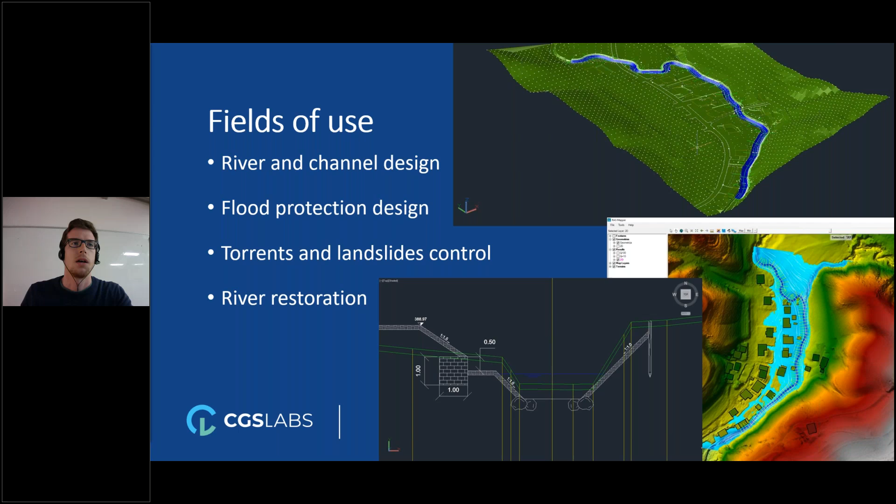So the most important field of AQUATERRA use is probably designing flood protection measures. And this is something that I have to show you.

The reason that there was no floods was that the Slovenian company Izvor designed a plan for flood protection of the Gradaščica River basin, which runs through this part of Ljubljana that was flooded in 2014. And this project was funded by the European Union Cohesion Fund.

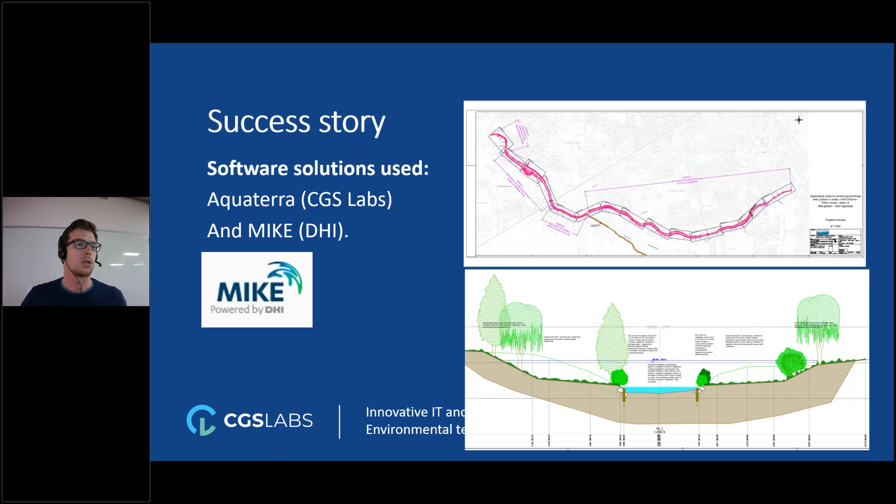So now my idea is that we go through some basic AQUATERRA workflow very fast, and then I will show you how to design flood protection measures in AQUATERRA. Let me just say that if you are just starting with AQUATERRA and need a more detailed step-by-step workflow to learn the basics, you can watch our online AQUATERRA training course.

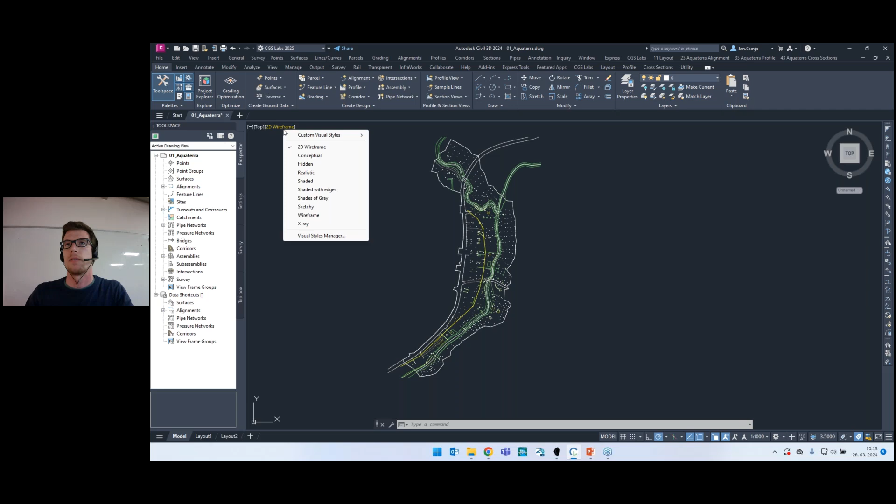So here we have the AQUATERRA layout. Actually, this is just data from geodetic survey, and we also have some bathymetry here. If we change the view, you can see that some of this data has its own elevation and some do not. We will use all this data to create a digital terrain model.

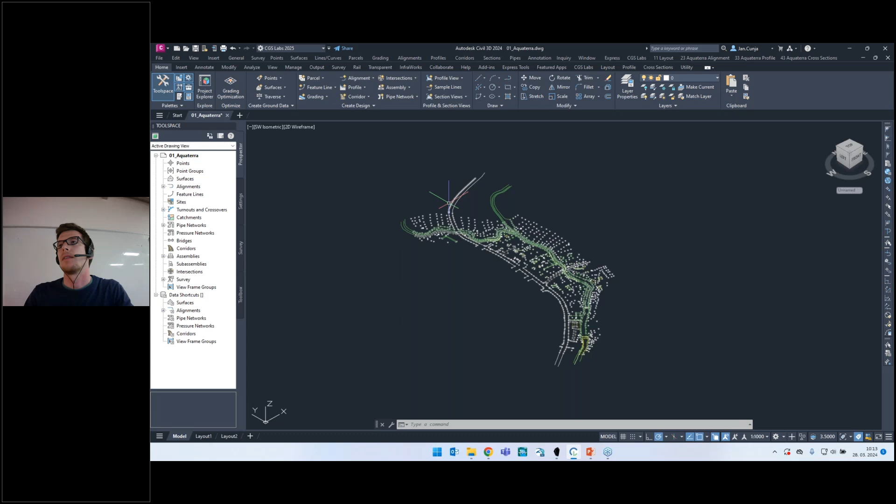But first, I want to add some other points that we got from LiDAR data to this model. I have already prepared those points and I can input them here, input points from file, where you can input different point files. And if you want, you can also make your own specialized file, so you can import any points you want.

Okay, so here I have my LiDAR file, and as you can see, this data is here for easting, northing, and elevation. We also have point type and so on. When I click OK, these points are imported here. Now I will just edit these attributes because I don't need all this attribute data.

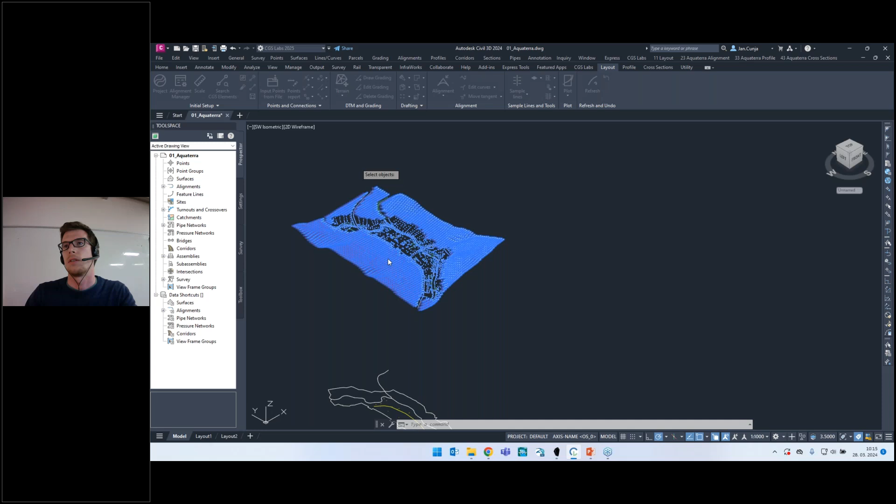These are actually labels and elevations. I will just close this so everything will work a bit faster. And now I can make a terrain from this.

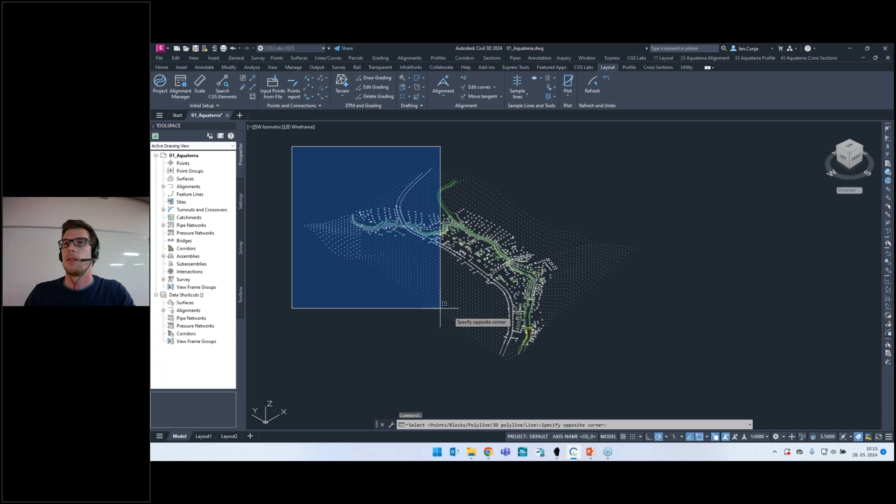We will create a digital terrain model, and here to create a surface, you can use points and break lines, and you can also add a boundary. You can insert from file and so on. With the plus sign, you add all these entities. Then you can select either you want a presentation with triangles or with contours, or both, like this. You can also edit contours, so we get more dense contours and so on. So we will just use triangles, and actually I will also close this because we don't need to see it right now.

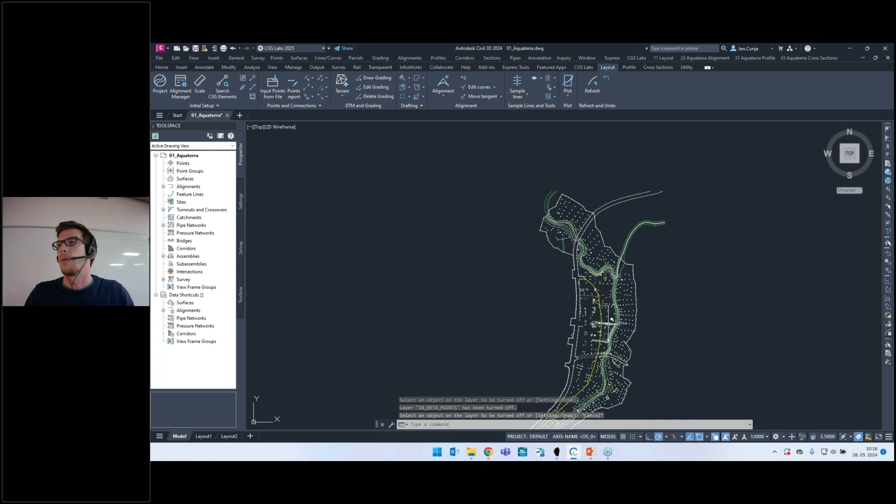Okay, so these are our elevations. I will also turn off these points because they're slowing the model a bit. Okay, so here we have our situation.

We have created our terrain, and now we want to start with the AQUATERRA alignment. You have different methods: you can create tangent polygon or best fit alignment using data from a set of points, or two polylines, or one polyline. But here I will use the polyline-to-alignment tool that will transform this polyline, which is actually my river alignment.

Let's do this again. It's important to have the alignment manager open, which will tell you which alignments you have inside your model. And if you don't have a river alignment, you can add it with a new axis. So here we will create this alignment again, and the longitudinal axis is created. The important thing is that you have this alignment active, and then you can create an alignment.

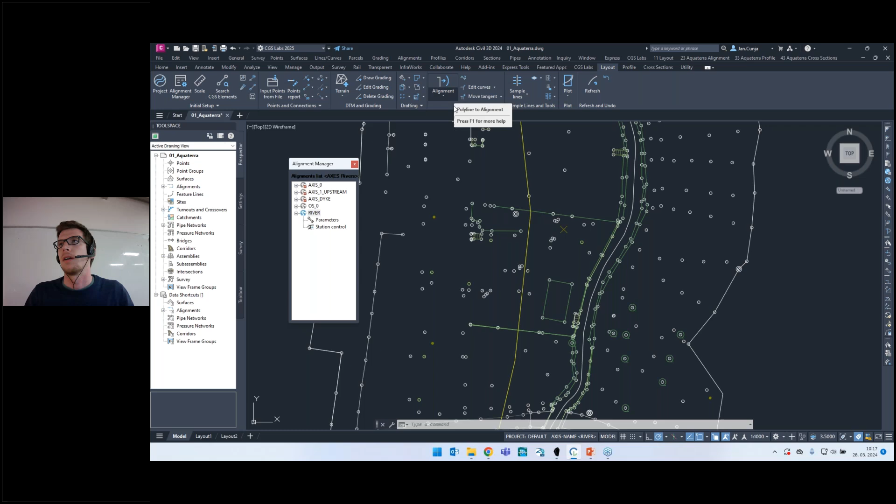Now we will drape this alignment, which is actually still at elevation 0. We want it to be draped to our surface. We have a triangular surface, but it's hidden now, and I will just drape it like this. So you see this green line indicates that the alignment is draped to the surface.

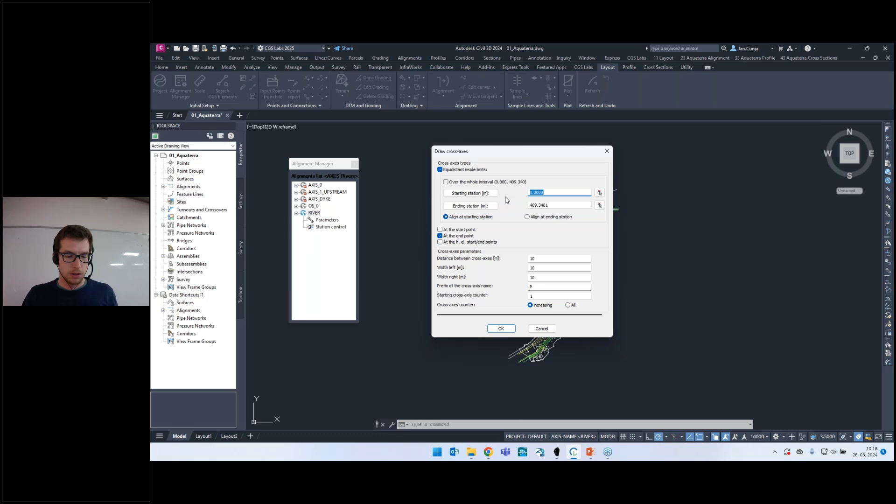Now we can also add some sample lines. Here we can set the spacing and maybe the starting station and ending station if you want. And then when you click OK, these sample lines are created.

Now, if we look from the isometric view again, I have sample lines here but not here, and I can drape them easily to the surface. So you can see these lines will then be used to create cross-section views.

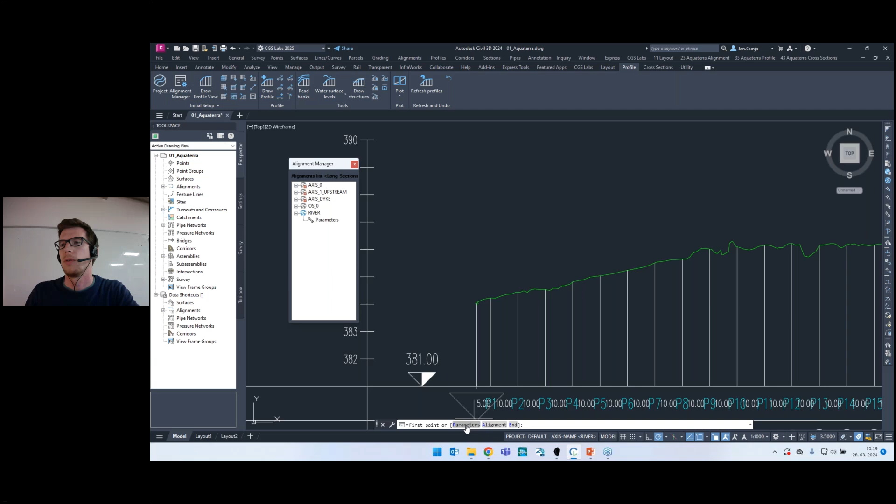Okay, we can create a profile view, and it's nothing to it - just select it, the location in your drawing, and then you can draw a profile like this. So here I want to go a bit lower, and you can use parameters to help you set the right elevations.

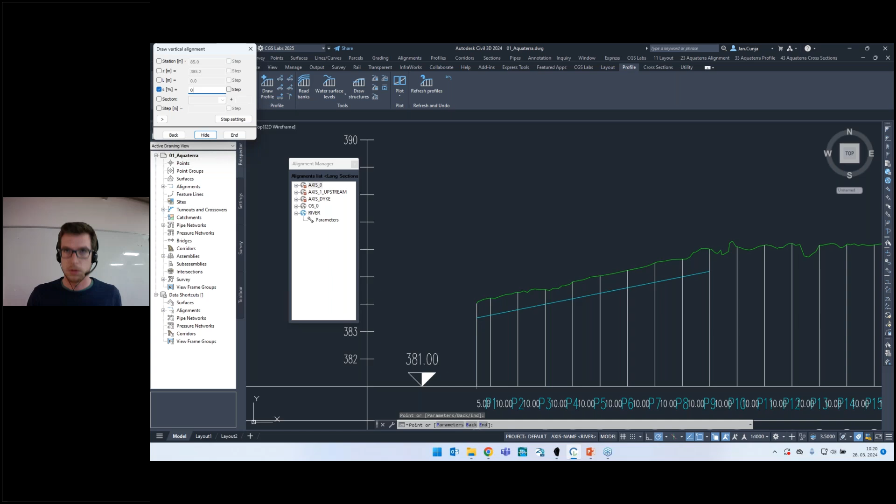So let's say from here I want to draw a slope like this, and then another slope like this. And now we have created, yeah, what we have here - this is a riverbed from the existing state. This is the green line that was draped to the surface, represented in the profile view, and it's the current riverbed.

And now we want to add another profile line that will be our new riverbed. This, of course, will be a bit deeper because this will be one of the regulations to prevent flooding now. So then we can draw a cross-section view like this.

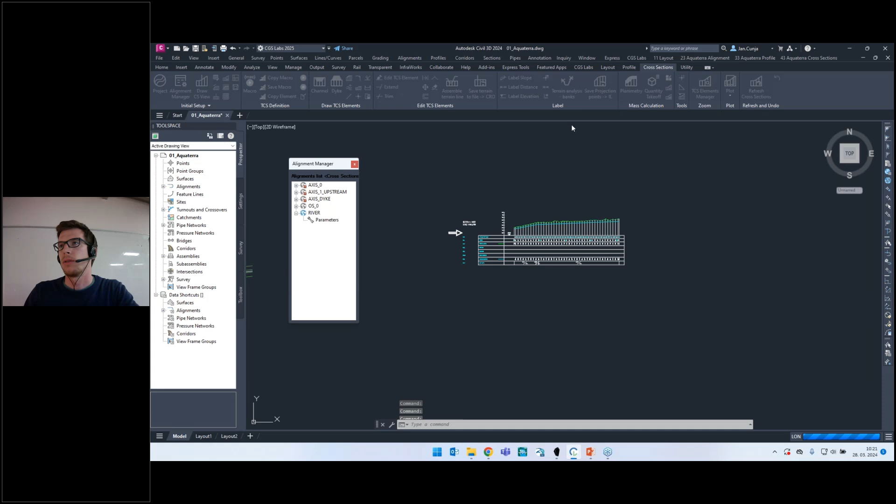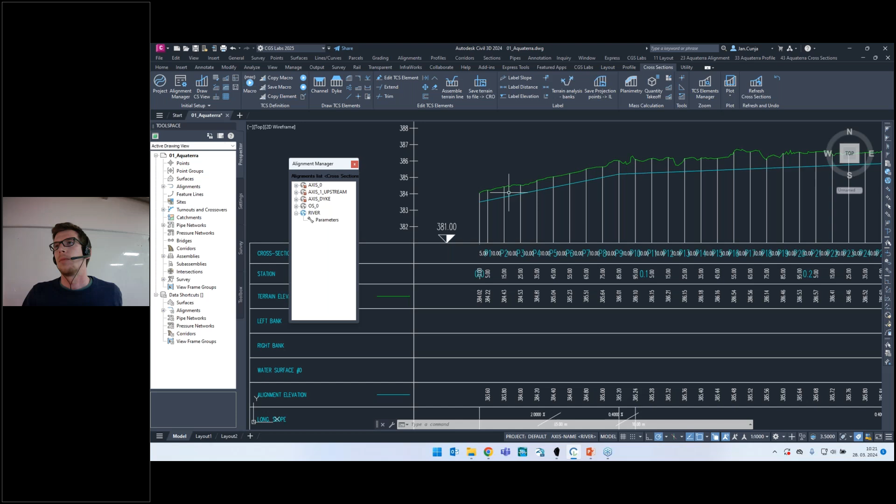And as you see here, you have these cross-section views. These are terrain lines, and this point here is the point where this newly designed profile was drawn. Okay, so this is actually the state before any regulations.

I just want to show you a HEC-RAS model I was working on to show you what was the previous state. So here, if you go to RAS Mapper, we can see.

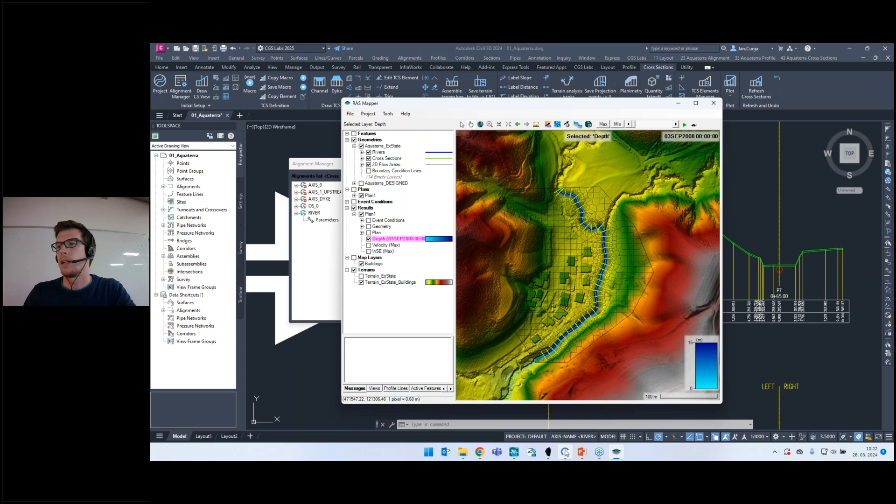So I have worked on this project. I have inserted the cross sections from AQUATERRA. I will actually show you how this is done, but first I just want to show you the existing state in HEC-RAS, and then we will show you how to import these cross sections later in a few minutes.

So here are the imported cross sections from AQUATERRA, and we can see here also I have this alignment and sample lines - everything was transferred to the HEC-RAS model. And then we made some hydraulic analysis, and here we can see the results.

So if I click play, you can see the water fills the channel and then spills over and affects these buildings here. So these buildings here are flooded. And now the idea is to go back to AQUATERRA and prevent this from happening.

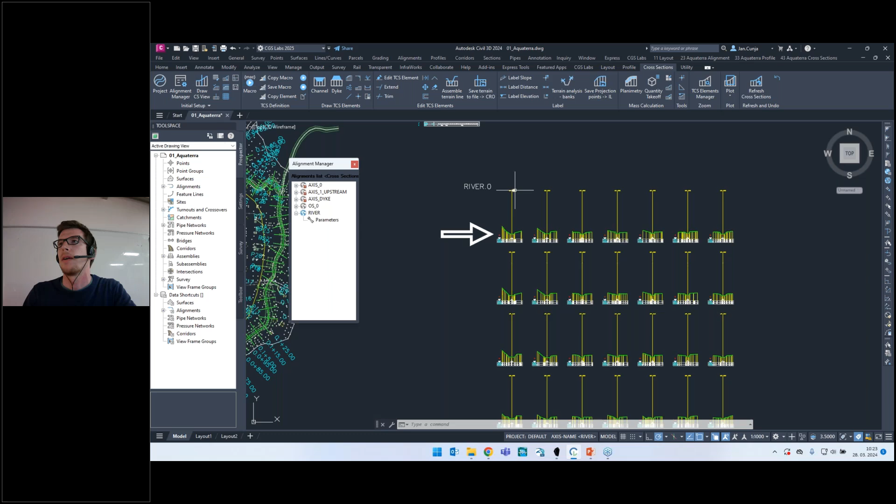So we will go back to AQUATERRA, and here we will design a new riverbed. So I will use some elements that we have in AQUATERRA, some typical elements that you can use in designing a channel.

Here in AQUATERRA, we have included these elements like channel dikes, embankments, channel linings, embankment linings, and so on, and some other things. So if I select channel, for example, I will get these elements. I can select the channel bed width and depth, and then the slope, and so on. And when I click OK, this channel will be attached to the point where I drew our profile of the new riverbed.

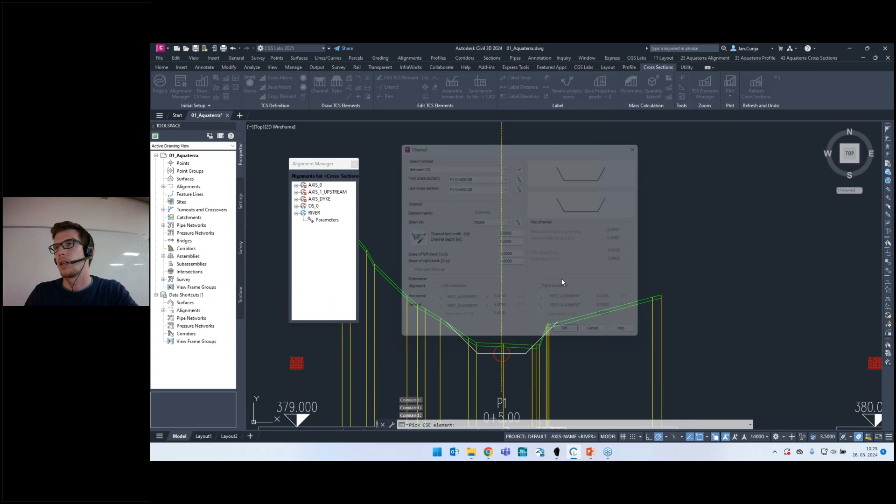So this is one thing, and then we can construct a dike, for example. Let's try this - we can also edit elements. I will make it a bit deeper so we can see how this dike functions. Let's say we have this dike, you add it here, and then the dike is constructed. So this is one option to add the dike, and then you can also add embankments and so on. Embankments are useful when the channel is under the terrain.

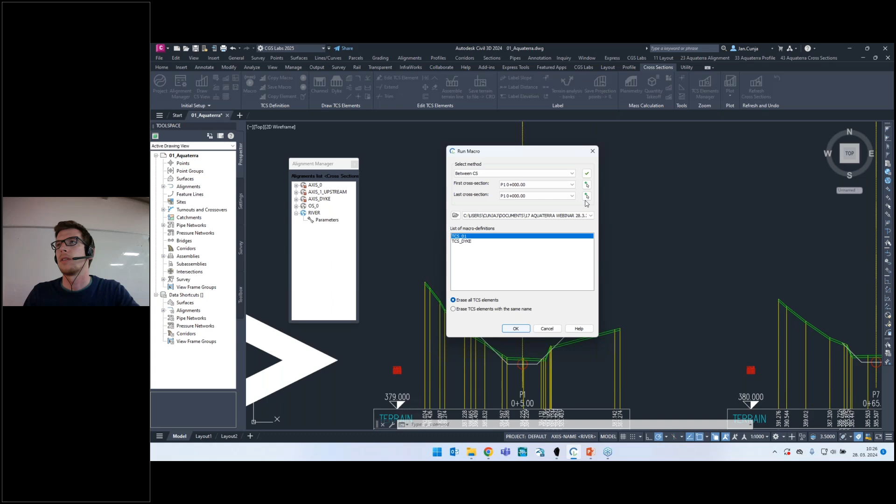To make this faster, I have prepared a macro. Macros can be easily saved - if you create something here, you just save the macro, click on the cross section, and it will be saved, which I have done. Now I have this macro on the list, I want it applied to all sections, and when I click OK, it appears on all cross sections. Here you can see I have a channel, some embankments here and here, and also dikes - they're very small here, like this one.

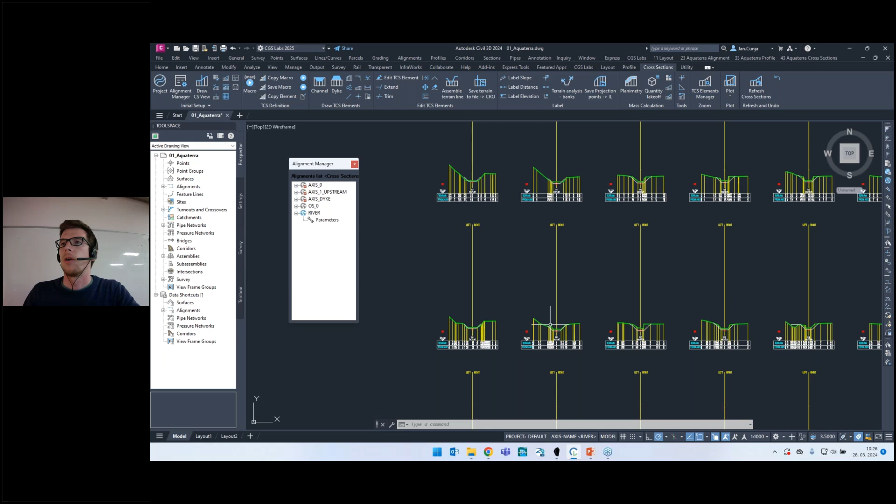When I have this, I can create from these elements a new terrain line, and this terrain line will be then transferred to HEC-RAS.

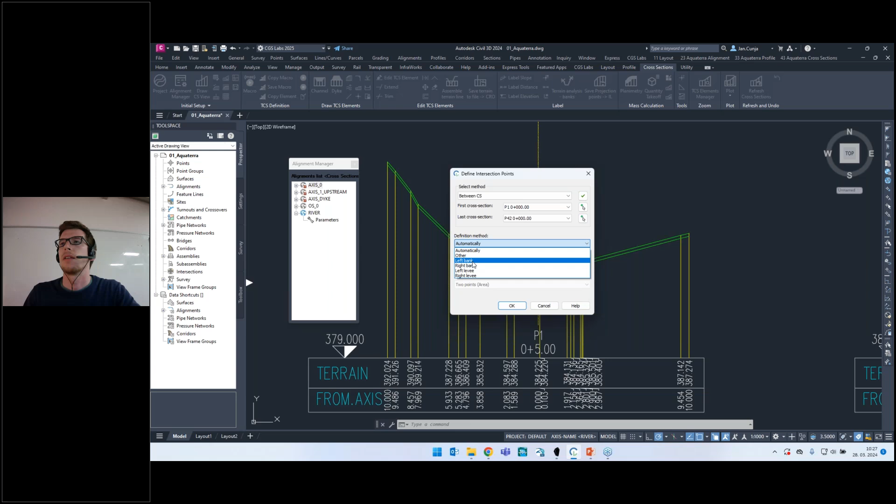One more thing we can do before we create the terrain line is define projection points. Projection points can be defined on any element, and you can then transfer it to layout as a line, because these points in each section will be connected in a line. But here you have some predefined intersection points like left and right bank, and left and right levee, and these points can be set here already in AQUATERRA and then transferred to HEC-RAS or MIKE. So here I have put left bank on the left dike, and again these procedures are all shown in a video in our basic training course - if you don't follow, you can always check it on our website.

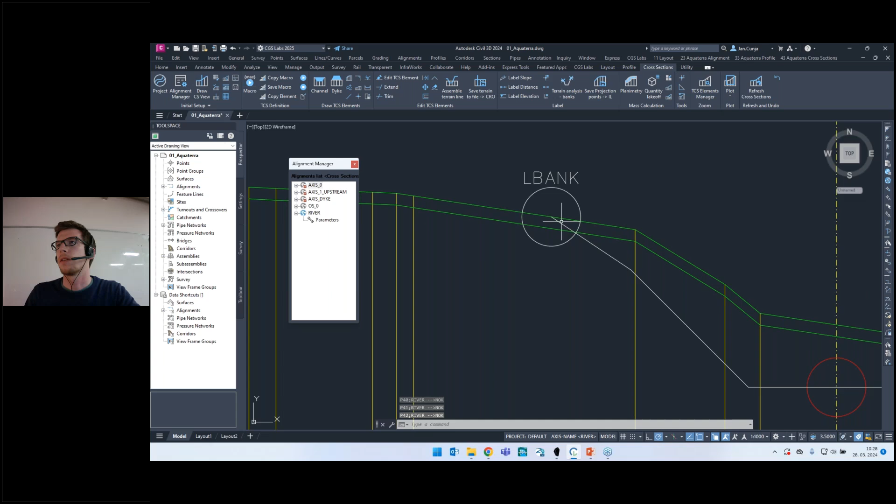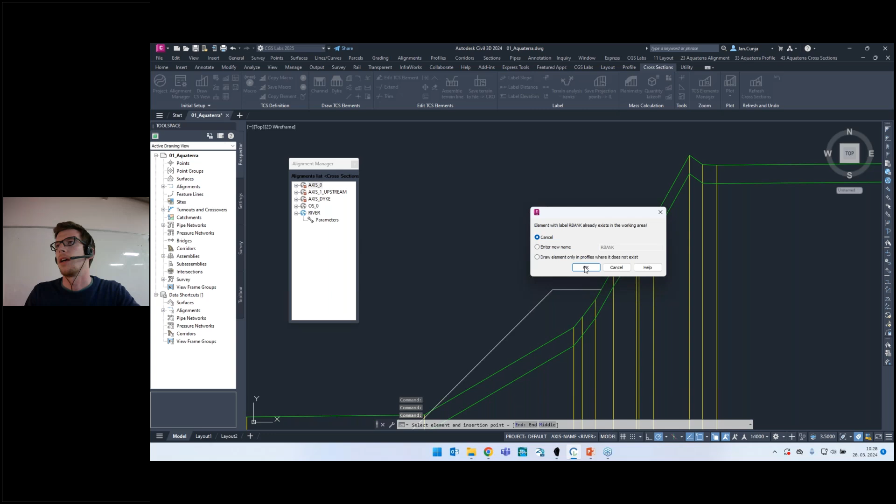I will just add some bank points. I'm adding a left bank again because here I have an embankment, not the dike. And on the right, I have put a point on the right embankment, and I will also put it on the right dike. When I say right bank and click it and select the dike, it tells me element with label right bank already exists in the working area on the embankment. So I say draw element only in profiles where it does not exist, and it will be drawn on other profiles as well. Now you can see we have created left and right bank points on all the sections - this makes things much faster.

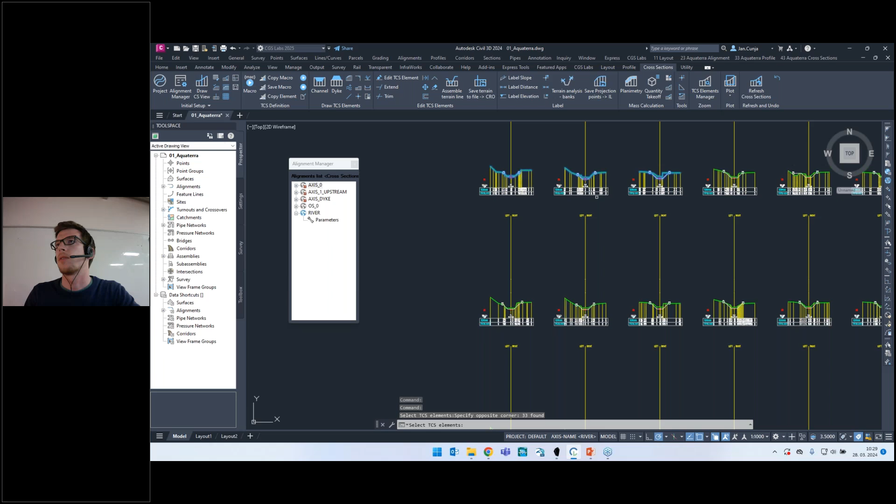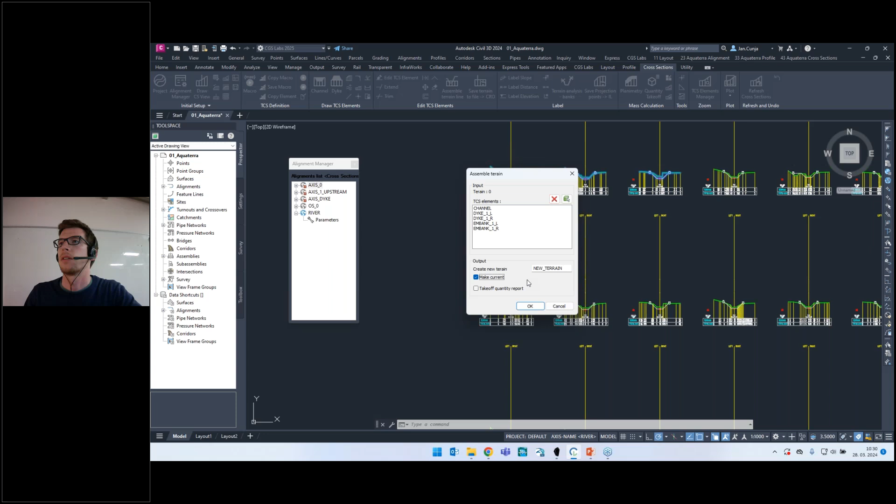So here we can name this terrain, and we can make it current. This means that when we want to work on our profile cross sections, this will be the terrain that we will be working on.

For example, when I select export to cross sections, here I can select the new terrain, and now I can export it to the CRO file. I will export it to the existing state CRO file, so I will replace this. Now I have exported this cross section.

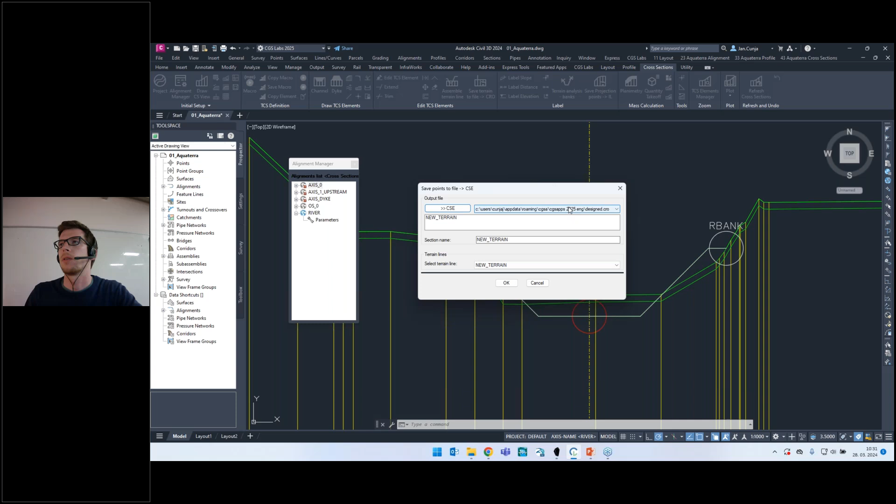Actually, I made a mistake - I wanted to put this into design, yes, because this is the designed terrain. We have designed it, and now we want to save it in this file. Actually, I have already done this before, so this is why I already have these files - it wants to replace it, it's not important for me. But now we have created a cross sections file.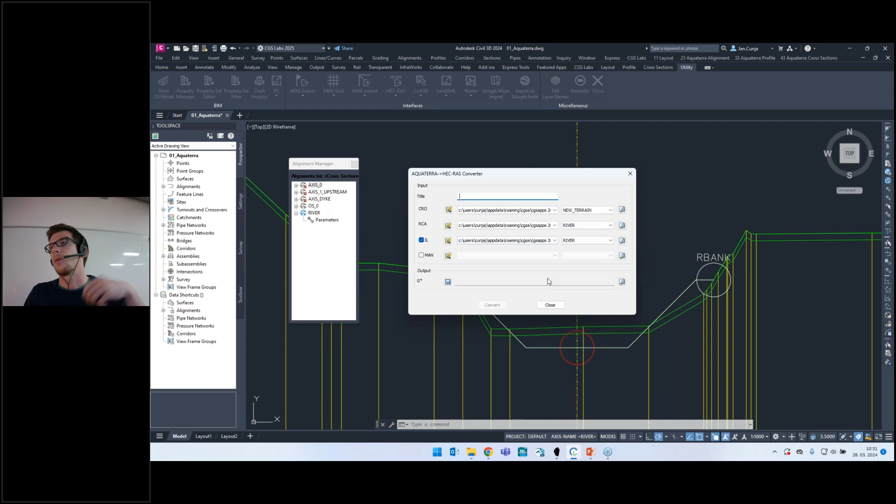First, we need to save the terrain. We need to save projection points that are our left and right bank. I have already done this, and we need to save sample lines here. Sample lines are actually the information of these lines here. And then when we have all these three files, we can export it to HEC-RAS.

Now, I know this exporting to three files and then using this command can be a bit time consuming, but we are just working on this new function that will do everything in one altogether. So it will be faster, but now you can also do it pretty fast.

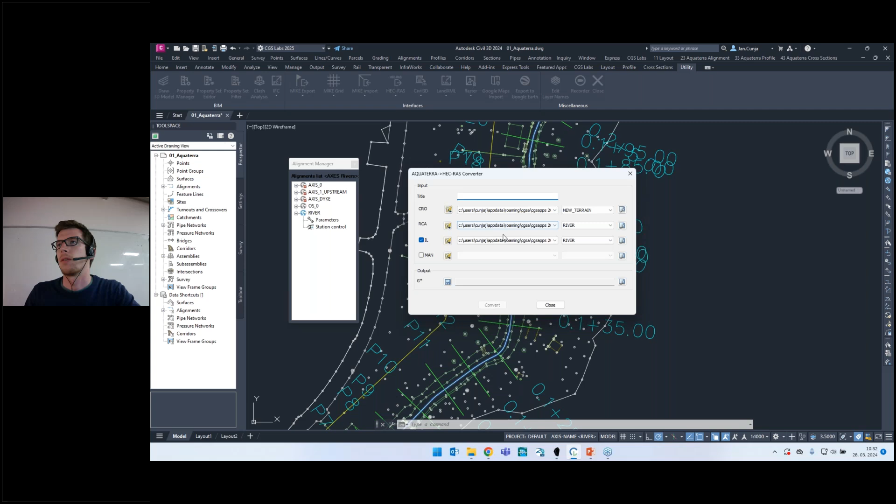Here you can select the output file. We will save it to our HEC-RAS project, to AQUATERRA exported files, to existing state. So river existing state will be our geometry. River designed will be our geometry, which I have already done. Because I have used this on my project, I will not save it now, but this is how you create geometry.

Now I will go to the HEC-RAS model of the designed state. Here we have actually everything inside.

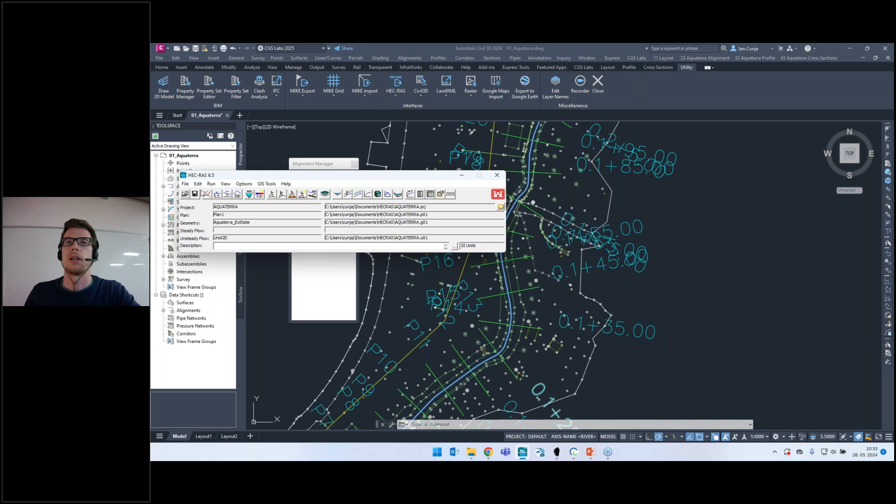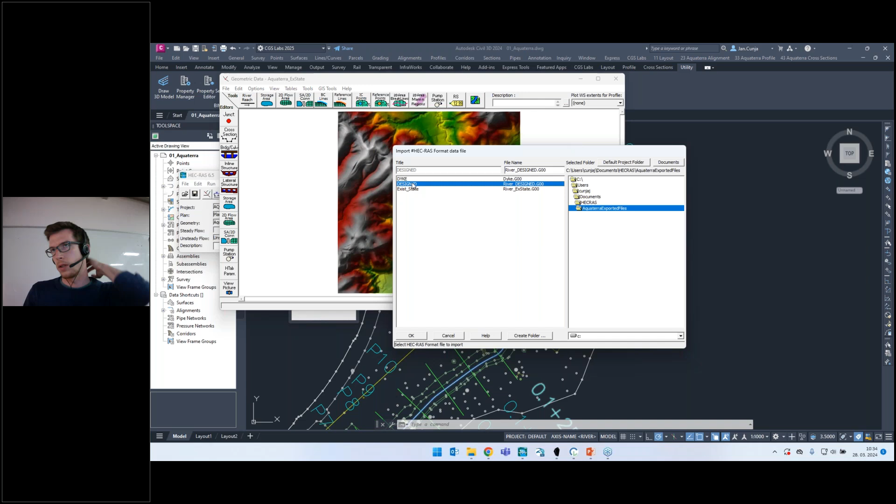I would import the geometry using file import geometry data, HEC-RAS format. Here I can select our geometry, actually it is this one. Yeah, so this is the geometry that will be imported, and I have already done this, so the geometry is here, in the form of sample lines and this longitudinal line, and also we have cross sections views here.

This is how we export the model from AQUATERRA to HEC-RAS. And now we have made some regulations here. We made this channel deeper and a bit wider, but also I want to add a dike to this model.

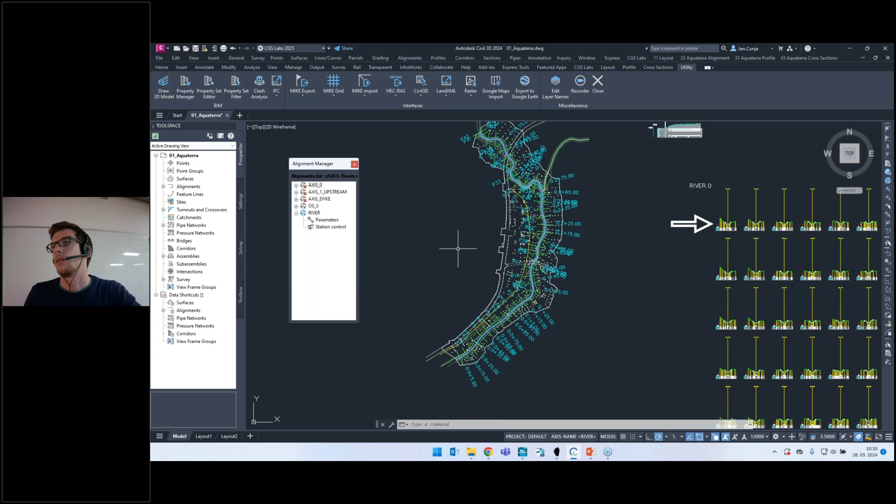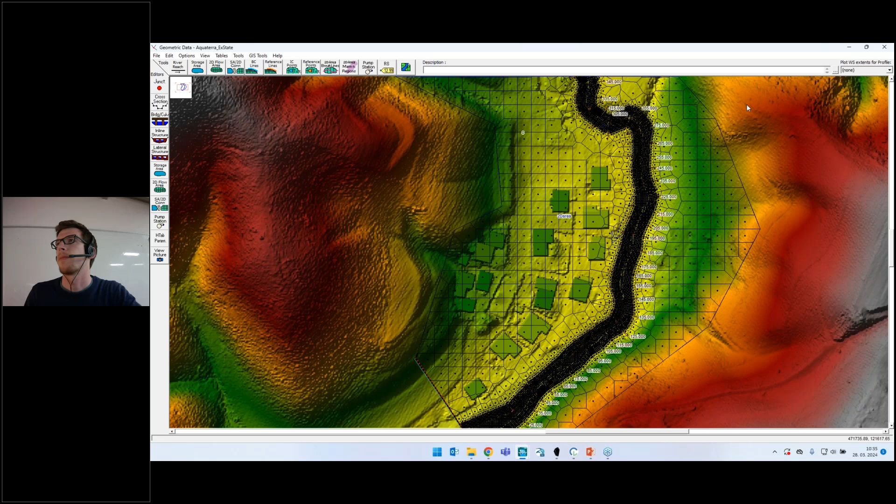So the idea is that the dike would be here between the river channel and between the residential area, so it will protect these houses from flooding events. And here, if you can see, this yellow line will be the axis of our dike.

Now, maybe these labels bother you. We can make them smaller with the scale, and it's quite easy to make them smaller. Now it's better. So here I will use this again as before when we made the river alignment. I will use this polyline to construct the dike.

I want just to save this file just in case. Now we can add another new axis, and it will be an axis named dike, or here I already have it on the list, and I will just click on it. Now I will use this polyline to alignment tool. I will select the dike, the longitudinal axis was created, and now we will go straight to adding sample lines.

We will make them 5 meters wide on each side, and everything else is okay. So now I have these sample lines, and I can drape them to the surface.

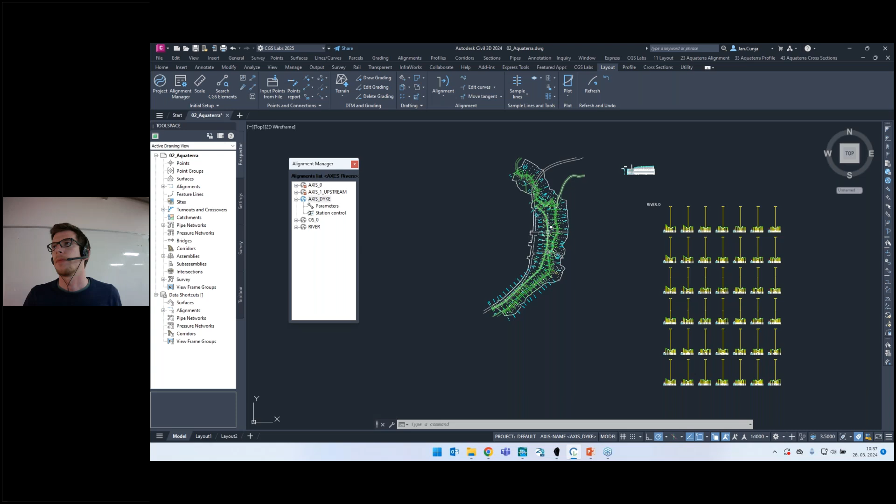So this is it, and now I will create a profile view. And here in profile view, we will add the highest elevation of the dike with the draw profile. So it's actually the same as before.

We will make it a bit like this, so it follows with the terrain. And this is our, let's say, the upper part of our dike that is constructed along this axis.

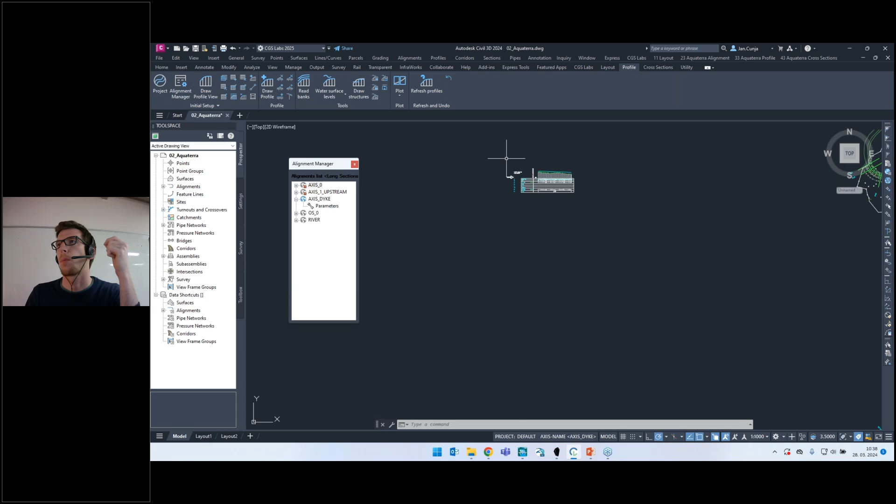And now we draw a cross-section view of this. We have the point here, and we want to draw the dike. And again, I have already saved the macro for the dike, and I can select OK, and this will draw my dike.

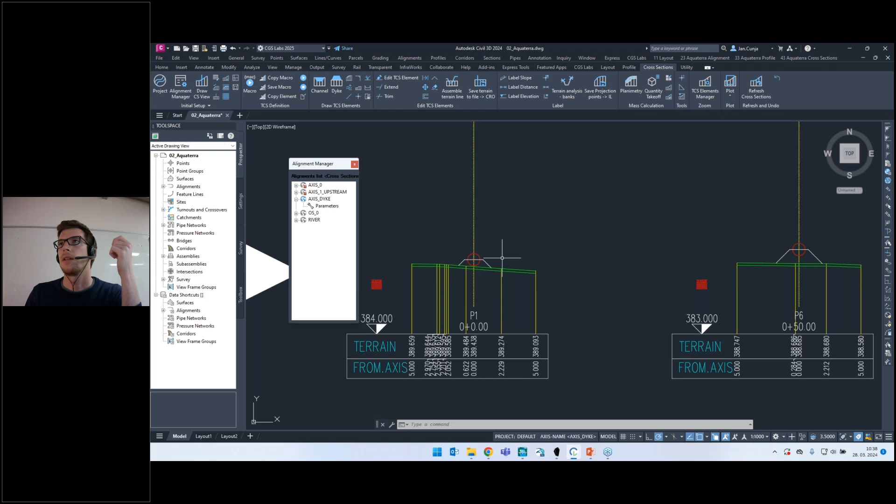Okay, so this is it. We will again assemble a terrain line. We just select all the elements that we have drawn. We type a name. And click OK. Now this terrain is here.

Now the question is how to transfer this to HEC-RAS, and you will see it's pretty easy. As before, we need to export the files, but first, because we don't need these parts of the terrain, we will use the trim function, which is not an Autodesk function, but an AQUATERRA function. And it works a bit differently because it only works on cross sections. But this means if I use trim on one cross section, it will also work on all the others.

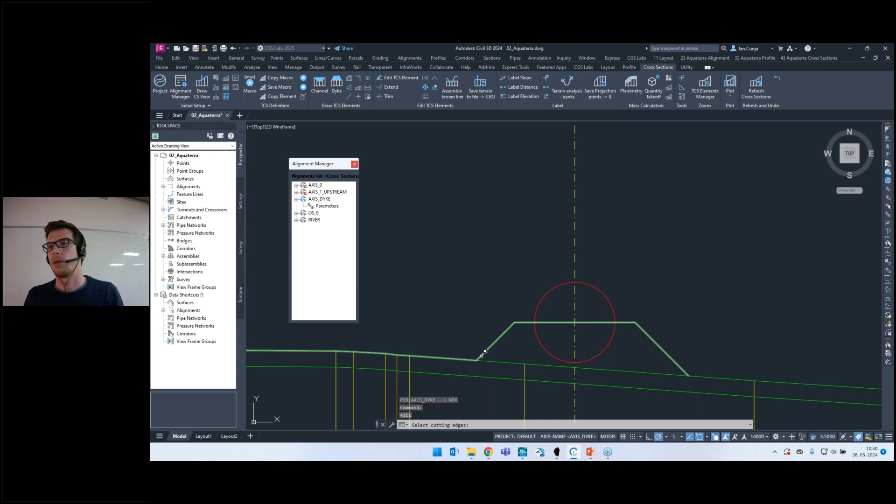So now I have selected the cutting edge, and now I'm selecting the terrain, which is now, you see, trimmed, but it's trimmed on all the cross sections. I will show you in a moment. So here I will just select again this line, so enter, and also this. Now, if I select similar, we can see that this terrain is trimmed on all the cross sections.

Now we can save this terrain to a file. I have already done it. I have put it into a dike CRO file. Yeah, we can replace it. We use this terrain dike that was constructed just now.

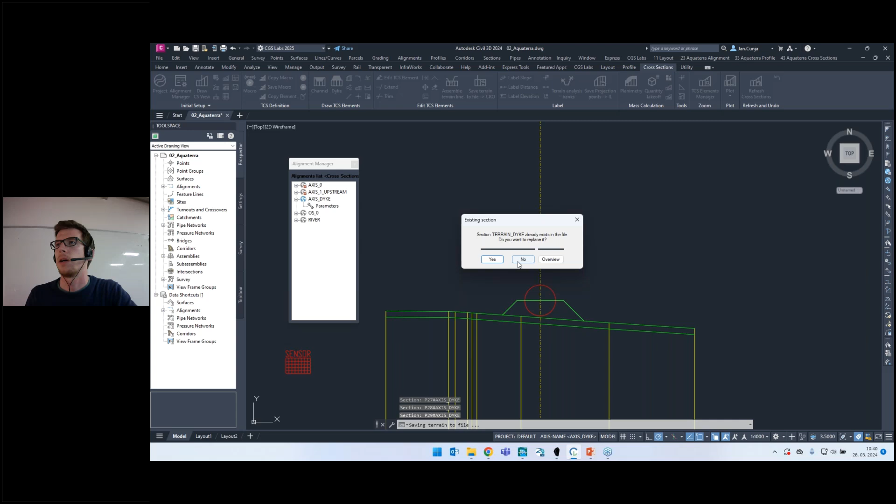We can replace it, and then we actually don't need to save projection points like before. We just need to again save sample lines here, and again I will use the name dike. Yeah, sample lines, so these are these sample lines here. Okay, now we have exported these two files, and now we can go back to HEC-RAS export.

There's one more important thing. When I go to save the RCA file, we need to press enter here. And that's it.

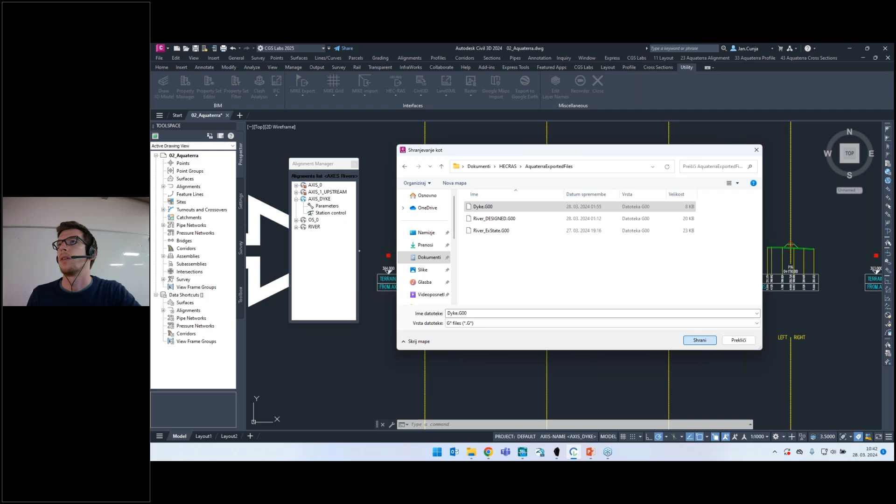Here I can deselect the IL file and just select the right one, so dike CRO file and dike RCA file. Now we can output this to get the geometry of the dike, we put it here, like this. And now conversion succeeded, so this is it.

Now, how to get this dike into HEC-RAS? I'll show you. We can open a new project, name it dike, and put it here, maybe in a created folder.

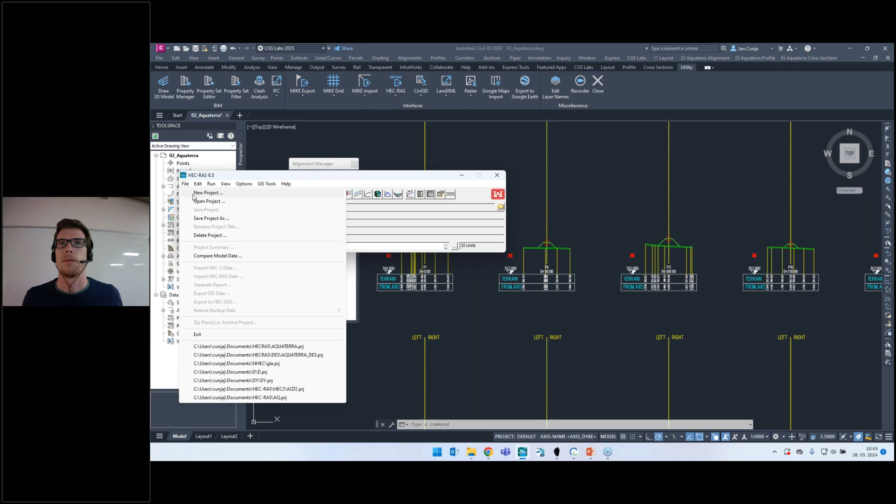Let's do it again, I'm not sure what was wrong. Okay, and now when we have a project, we just add import geometry data. We will use our exported data here, so dike, and we have to select the right units. And now we have here the cross sections.

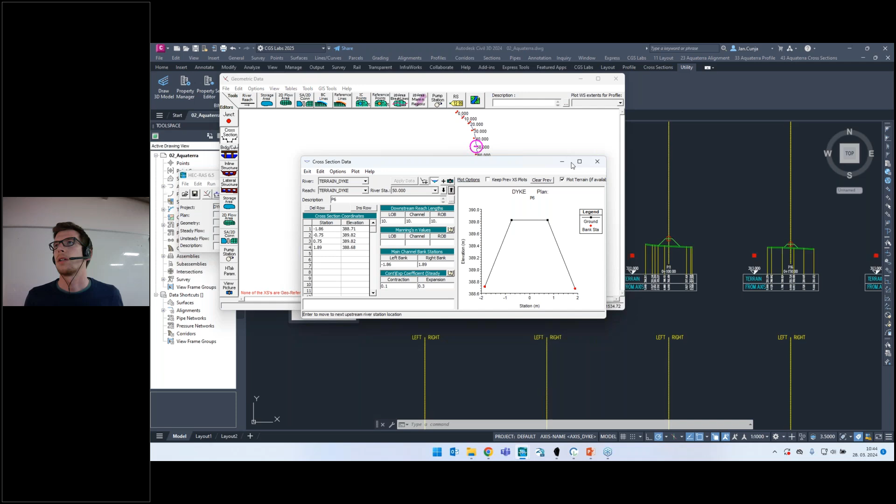That's okay, it's okay. So these are cross sections, and then we also need the cross sections and the longitudinal alignment with sample lines. And if we save this geometry, now we can...

I will show you how to put the dike into your terrain model now. Here we have the cross sections, so here we have our dike, and we can export this layer to GeoTIFF. This will create a GeoTIFF from the cross-section data.

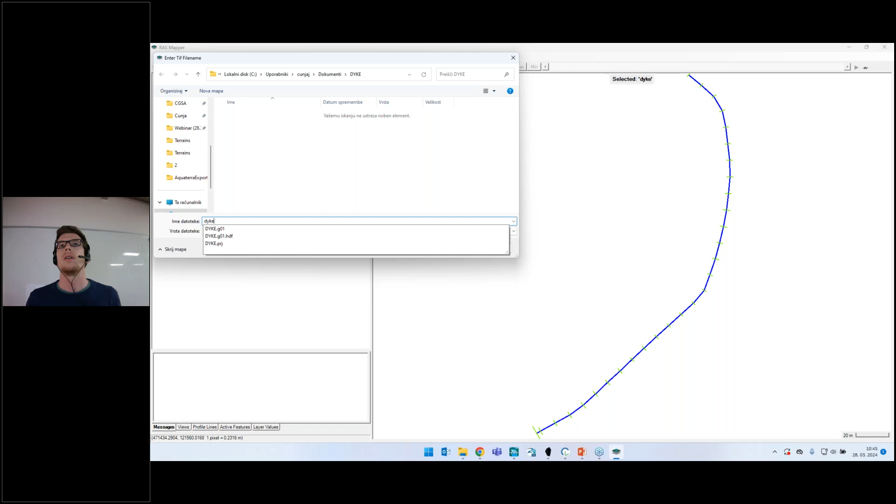And we can save it here, like this. We put in the raster cell, and like this we have created the terrain.

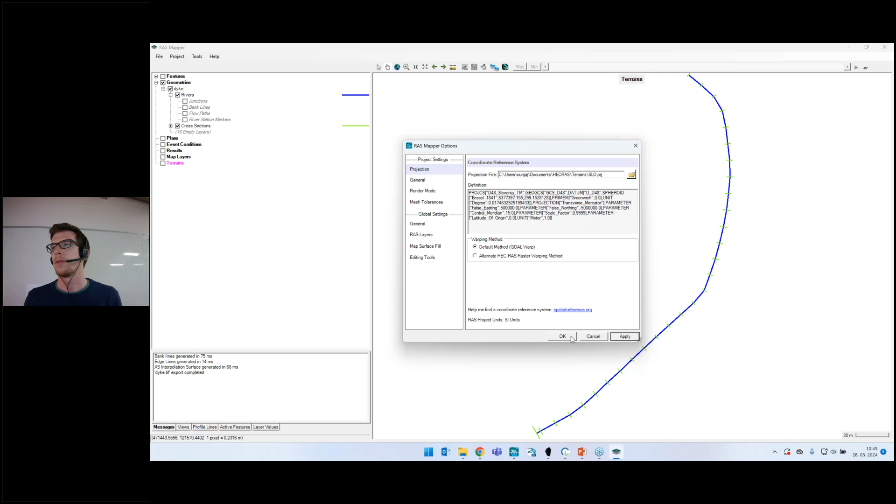Actually, here we have to first assign a projection file, not project file, but projection file. I have it here, this is for Slovenia. And now we can input our terrain. As you can see, this is our terrain of the dike.

And this we can connect with other terrains, like we can go to create HEC-RAS terrain. We can use the terrain, and we can add also our dike to this terrain. So it's important that dike is on top of the list. And now we will create a new terrain, which will consist of these two terrains. So the basic terrain was all this, and now here we have also our dike.

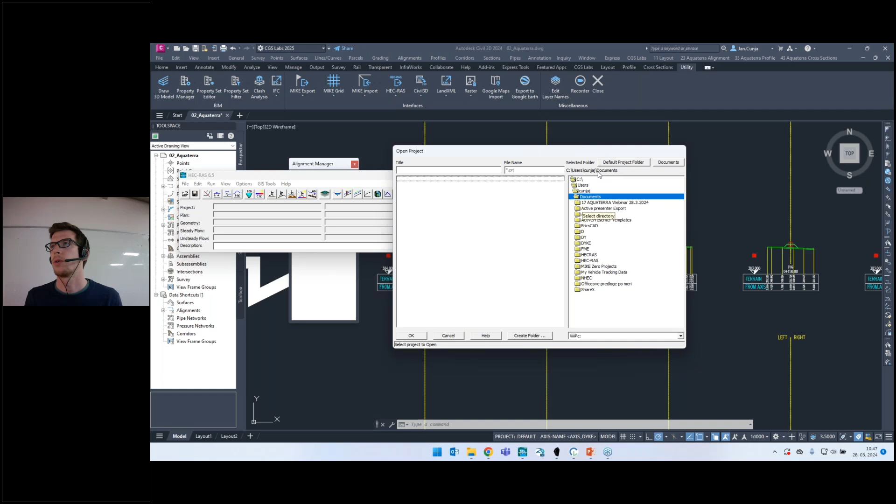Okay, so this is just to show you how this is done. I have already prepared this project, so I will show you how it looks like in the end when everything is set as it should be. And here we go. So before, if you can remember, we had this situation where the residential area was flooded.

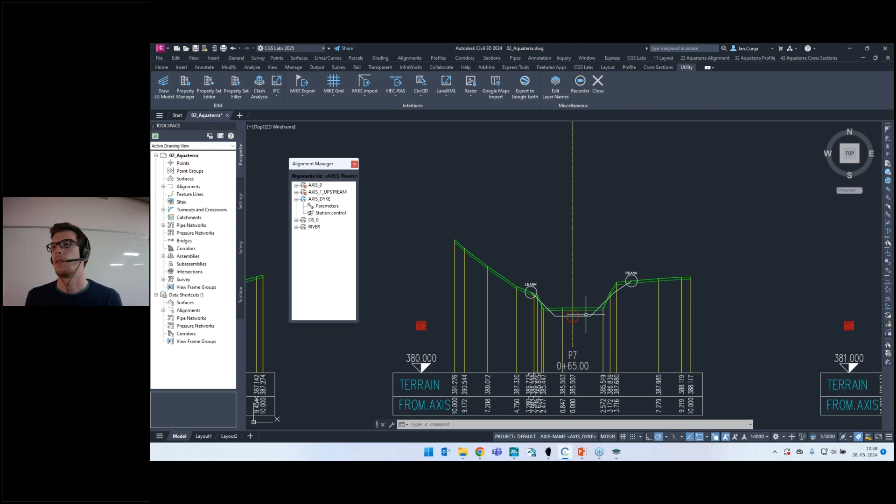Yes, so we can see the animation again. And now what we have done in AQUATERRA was a few things. We have first deepened the riverbed and then also widened it. And we have added a dike, which was constructed using the same AQUATERRA functionality as for the river channel, and we have put it here.

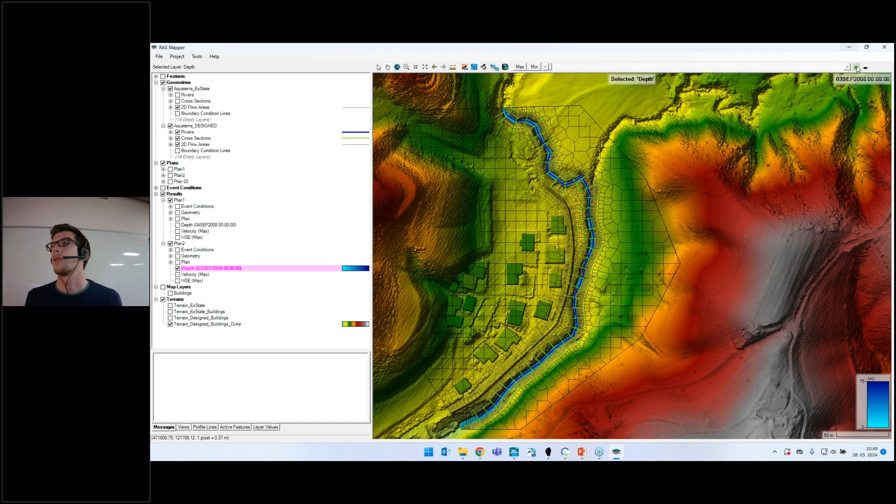So now from this flooded situation, we can go to a new terrain that we have built. We have made the river a bit wider and deeper, and we have added this dike as we have shown before. Let's see how things work now. If you start the animation, we can see that water comes out of the channel, but is then stopped by this dike.

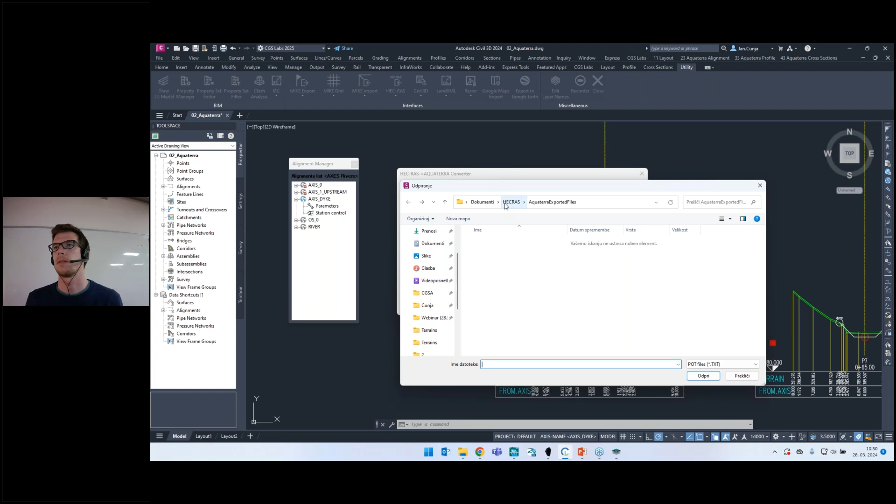So this was a way that you can use AQUATERRA geometry in a HEC-RAS model and then do the hydraulic calculations. But you can also import the results back. So if you go to import from HEC-RAS, you can select the exported file, exported text file, which I have here.

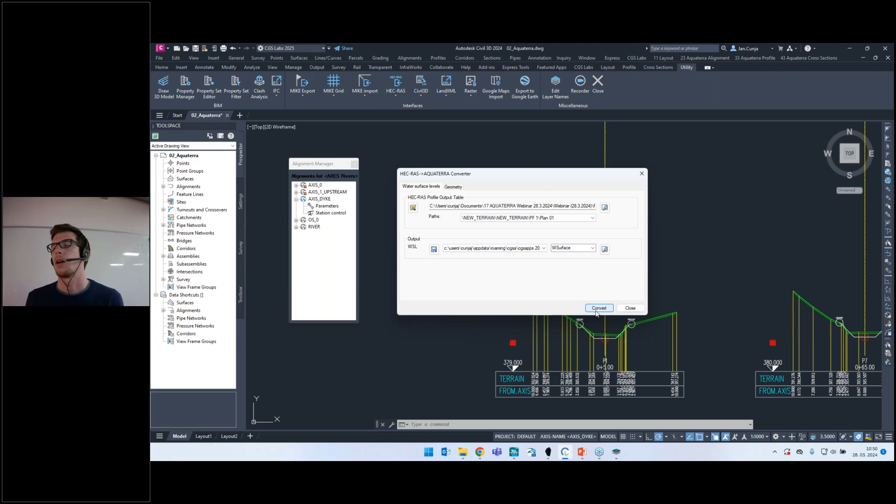And these are your results. Now you can save this to some water surface file. We will add this. Yeah, you can just create a new water surface file, of course, if you don't have it here. But I already had it because I've done this before. And now this is converted.

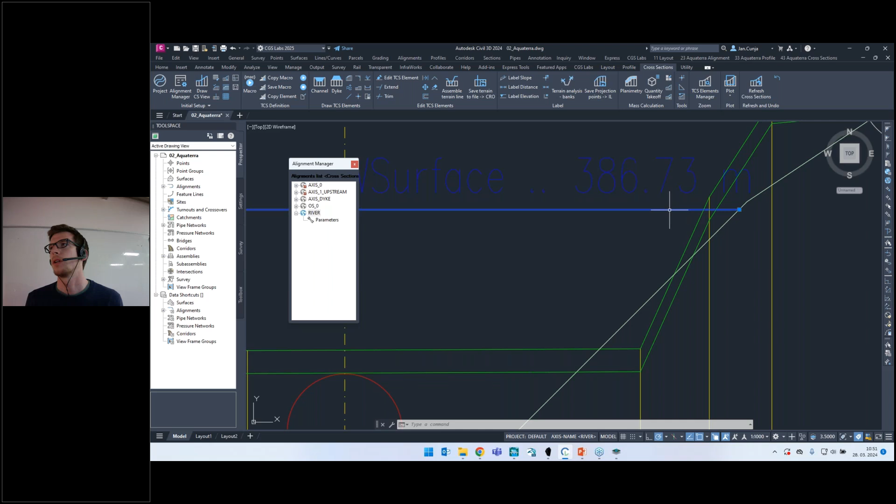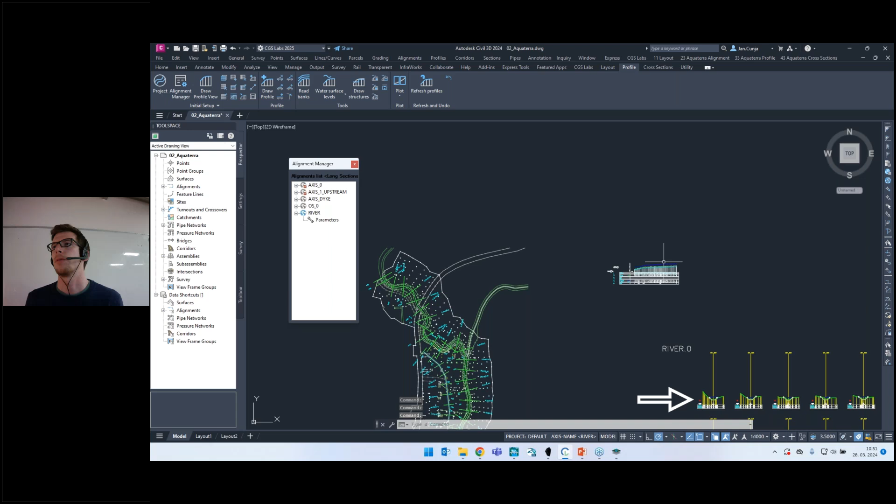If you can notice here, this line goes to the new designed terrain because we have selected that it's current, and this is what we want. You can also transfer the water surface levels to profile view, and this completes the cycle. So you have export and import from HEC-RAS, and you can also export to MIKE, export cross sections and axis to MIKE, and then import back from MIKE.

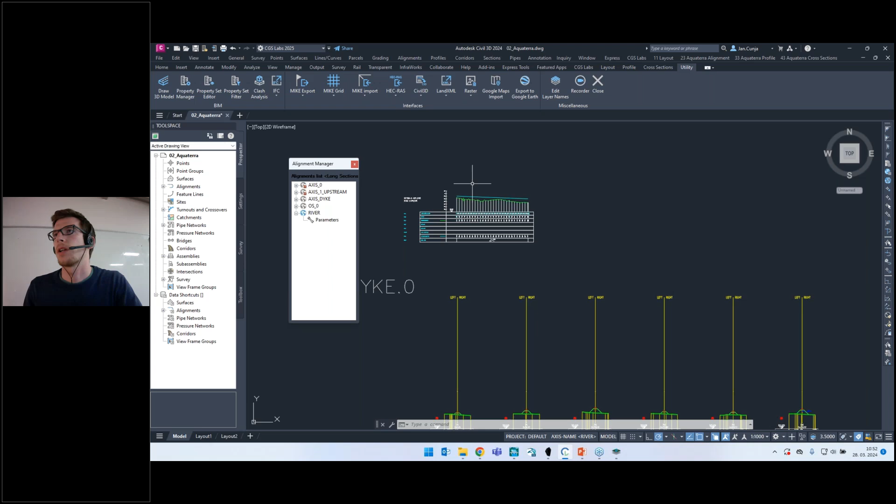Before I show you shortly how this is done in MIKE on some pre-recorded MIKE session, I wanted to show you also how easy it is to create a 3D model.

In AQUATERRA, for example, let's look at this dike. We can go to cross sections and use planimetry. We will hatch our dike, and I will use the inner point method, but you can also use between two polylines, which means you select the upper polyline and the polyline below. Here we select inner polyline, use TCS elements and terrain, and select OK.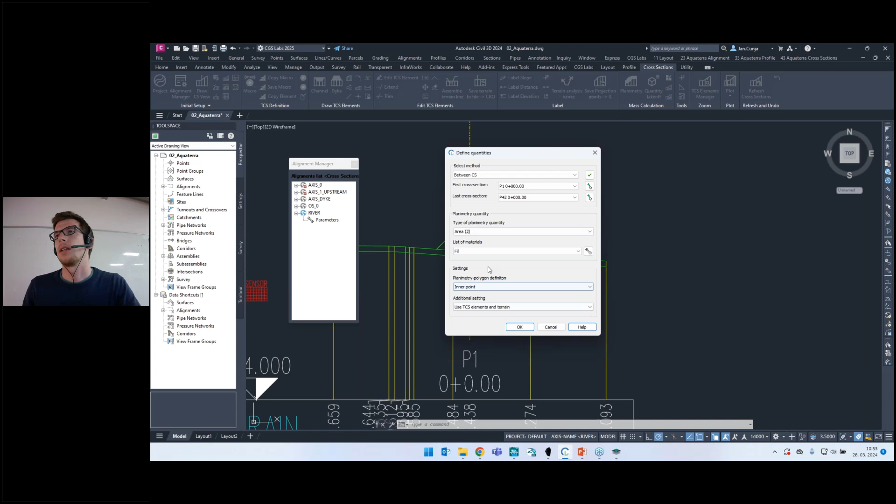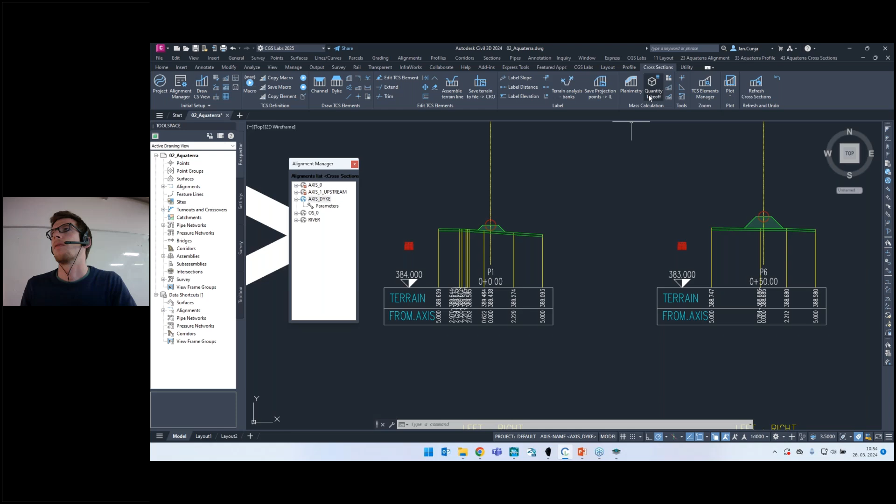Now I will just click here and inside. Let's do it again, I have to select the proper alignment. Here is important, and now you see that this dike is hatched, and this surface here will represent the amount of material that is needed. So you can very easily do the quantity takeoff table.

Here we will calculate by cross section. We will select where the value will be shown. We can save it to file, but now I won't. Then we can insert the summary of quantities also in our drawing like this. Now when I'm satisfied, I click OK. And as you can see, this is the amounts of fill for this dike, and here are the amounts also organized in a table.

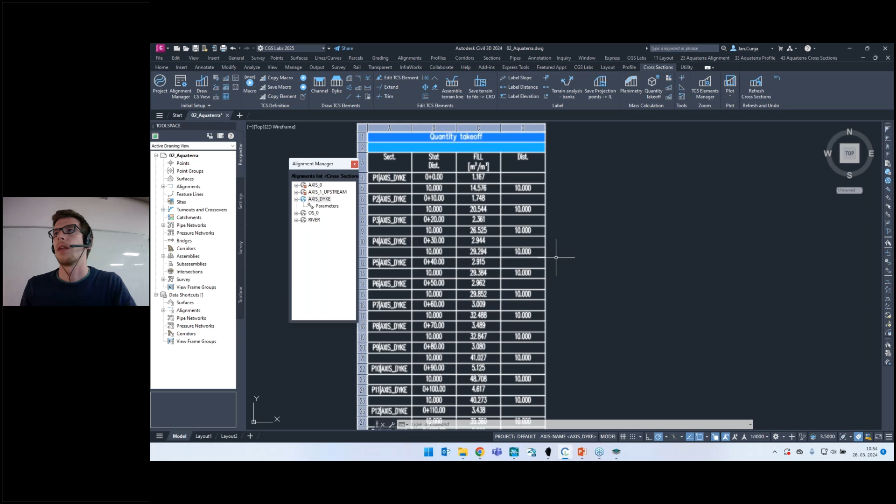And in the end, you have a summation of these values. Okay, this was very fast. You can of course create your own materials and so on.

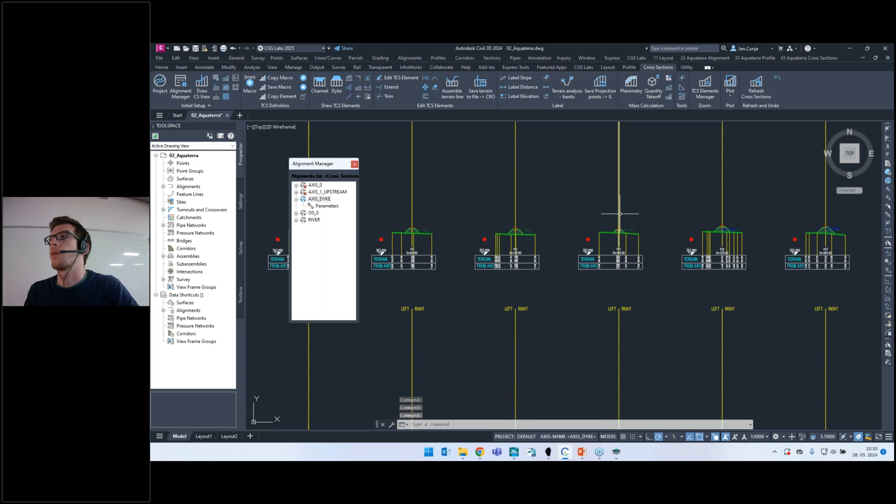But now I want to show you one more thing, and it is the creation of a 3D model. We will create this 3D dike, and I will go back to our terrain function and turn these triangles on so we can see what will happen. I will also change the view to realistic, like this. Now we go to Utility, select Draw 3D Model, and here we want to align it on this axis.

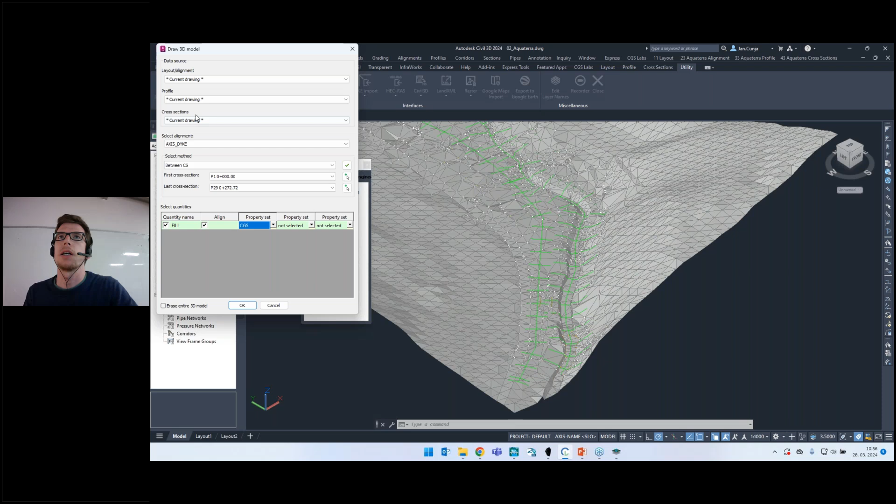Another thing I will comment on a bit later is the property set. Let's select the CGS property set. Now we select OK, and this dike is created. So this is the 3D model of the dike, and it's just as easy to make a model of the river channel. So with the click of a button, you can create a 3D model.

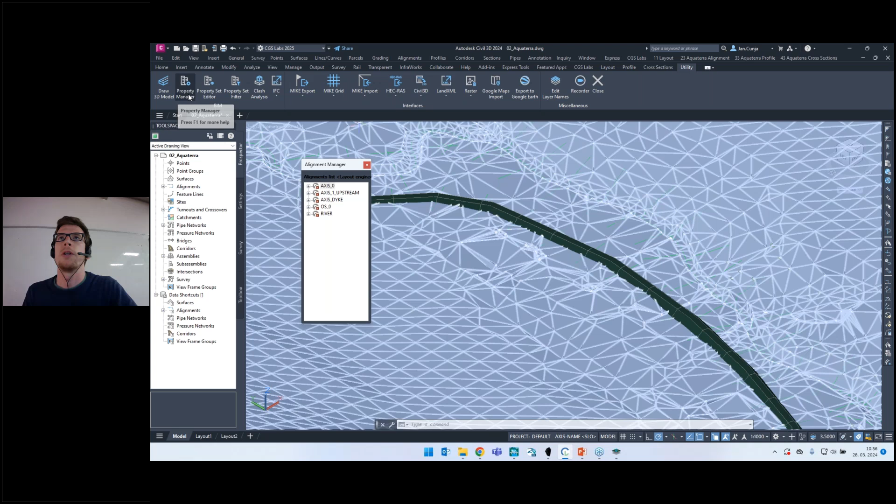So the property set that we selected can actually be managed in the Property Manager. Here you can add different properties to these 3D solids. Here is just the table - you can organize it, you can add your own, you can add different values.

Then if you go to the property set editor, you can select one of these 3D solids, and then you can see the properties these solids have. So it has a name of the axis, an end station, a start station, a volume of this 3D, and the material of this 3D model. And these are all data for your BIM model that you need - well, not all of them, but these things you need for it.

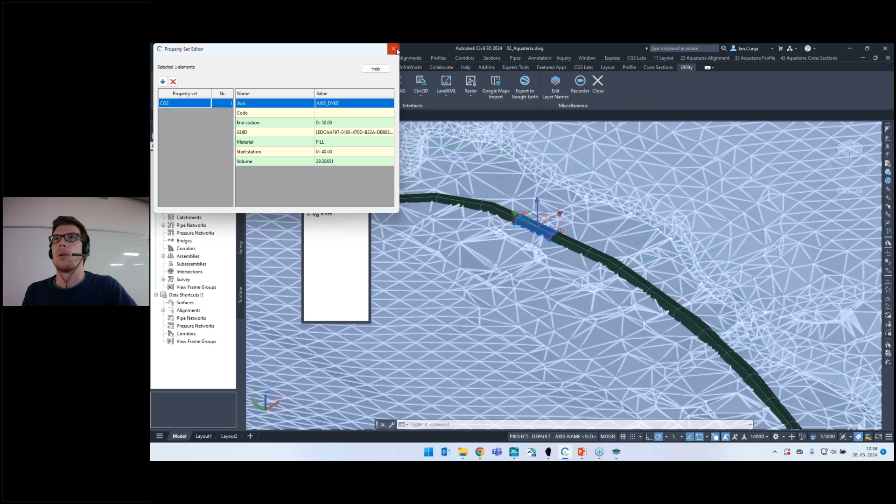And you can of course add your own property sets. You can add 3 property sets to one model at once, so each of these elements can have 3 property sets. Here we have also a property set filter, with which you can easily find properties that you're looking for.

Now everything is selected, but I can also use, I don't know, volume and station, and I select one of these, and then the element with this property set will be found. We also have clash analysis. You can export these 3D models to IFC format, which is standardized.

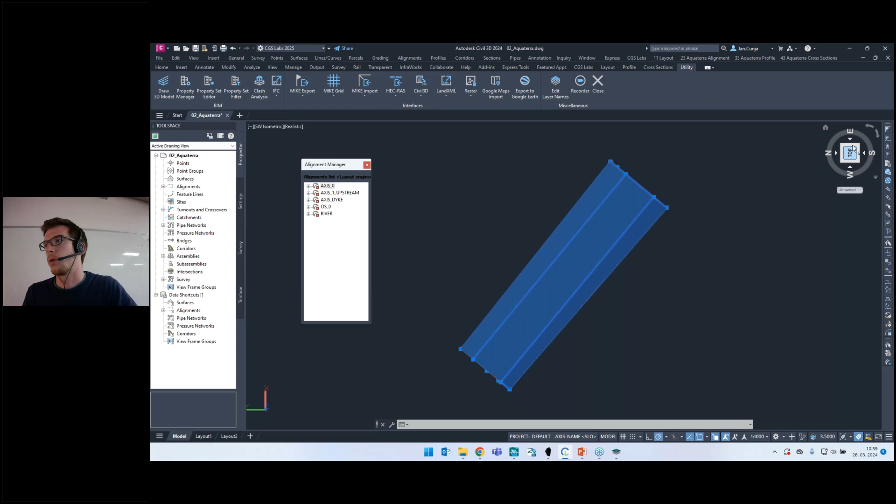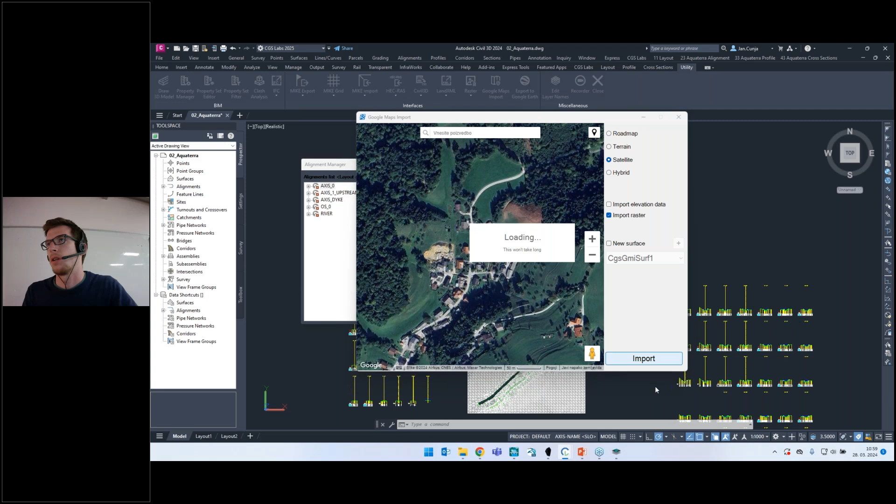Then it's also possible to add some Google Maps picture. Actually, you can only insert raster or also elevation data, which is of course not as precise as LIDAR data, but for getting an idea of the project it can also be useful maybe. So you can import elevation data from Google Maps, but now we will only import the raster, and from this elevation data you can create a surface, but we already have a surface, so I will just click import just so you can see the picture, if we can show it.

Yes, like this. Okay, so here is, as you can see, for example, our axis. So it is also possible to export this model to Google Earth.

Yeah, I think this is everything I wanted to show you today.

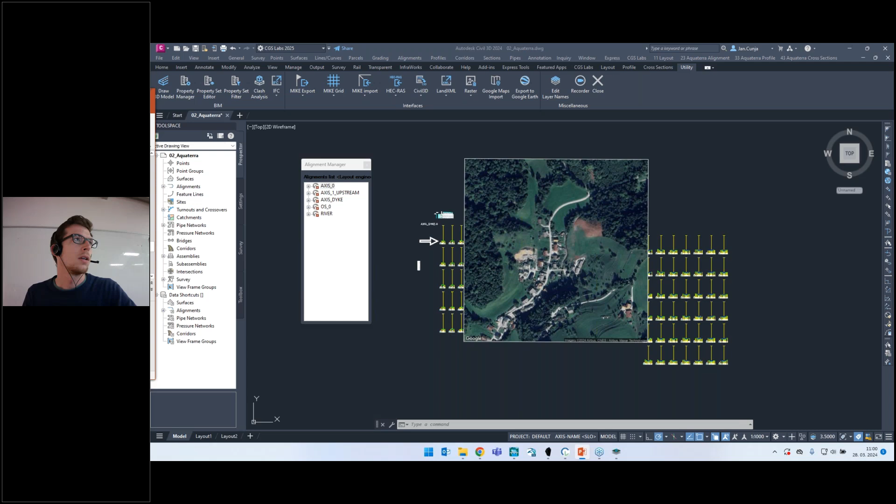One more thing. As I said, the hydraulic modeling can also be done in Mike DHI software. And of course, AQUATERRA is an add-on that runs on Autodesk, AutoCAD, and Civil, but also on BricsCAD, as you see here.

And here is another example where we have used this data from AQUATERRA to export it to Mike.

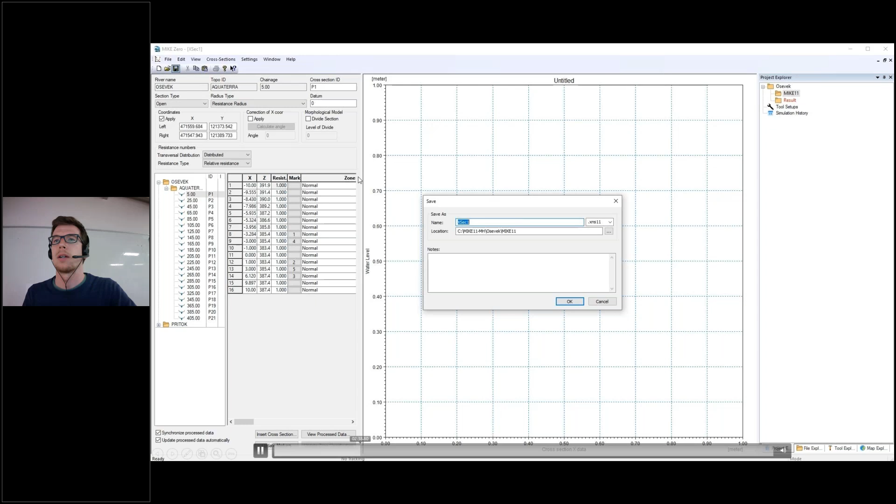Here you can see the alignment in Mike 11, and then we have also imported it to Mike Hydro, which is now called differently, I think. But it's the same thing.

So here we have cross-section geometry data, and we can also show the results and see it in MIKE View like this.

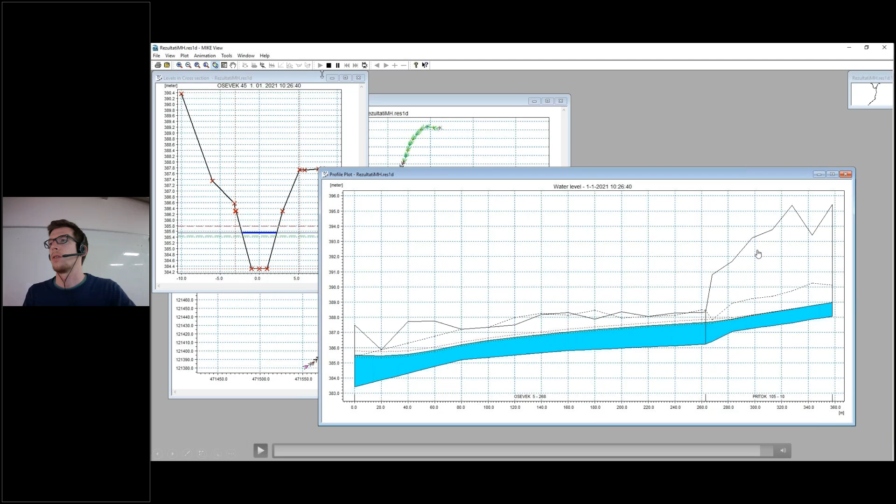Okay, so from my side, this is everything. As I said, if you want, you can go to our CGS Labs webpage for more information, but I think Gregor will also have some of these useful links now. So Gregor, I leave it to you.